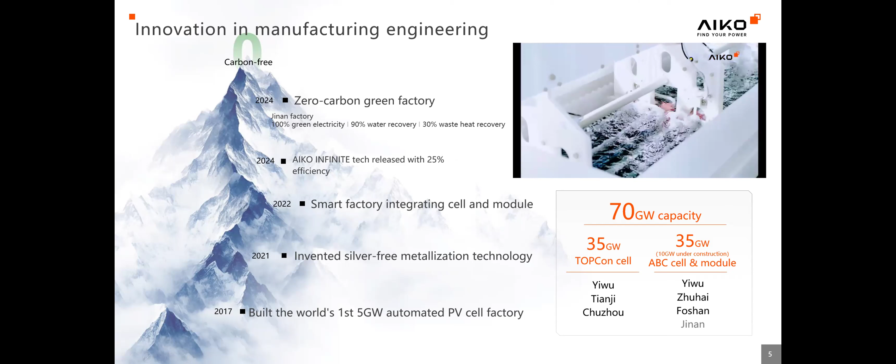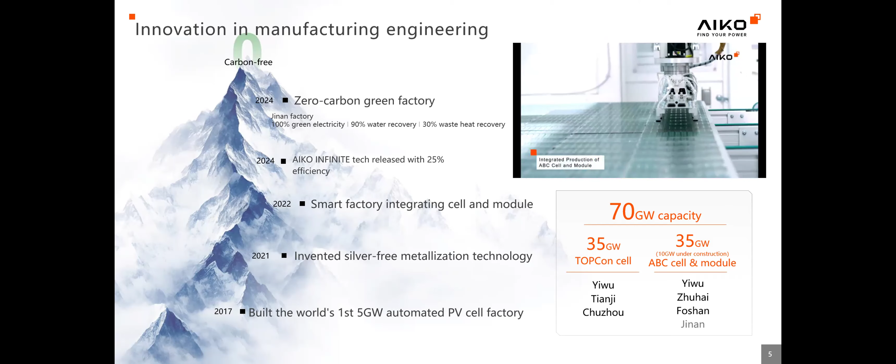This is a video of our production. Yes, as you can see, most things are automatic. For those of you who are familiar with production lines, you can also see what brand of machinery we use, because ABC was quite a new technology. So we had to design quite a lot of those production machines ourselves with the other factories. Yeah, so it is something that is quite innovative to see.

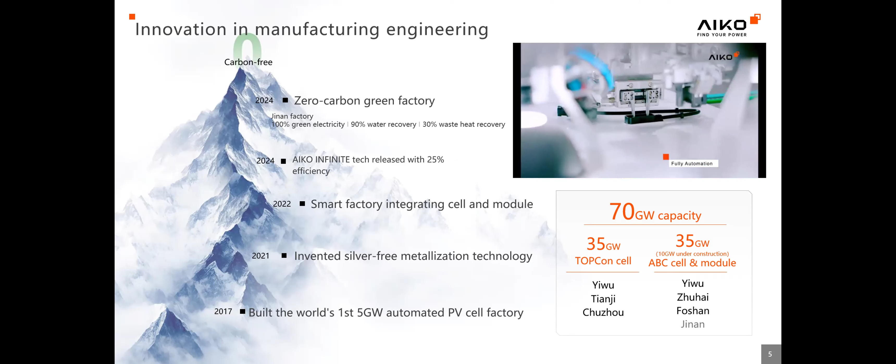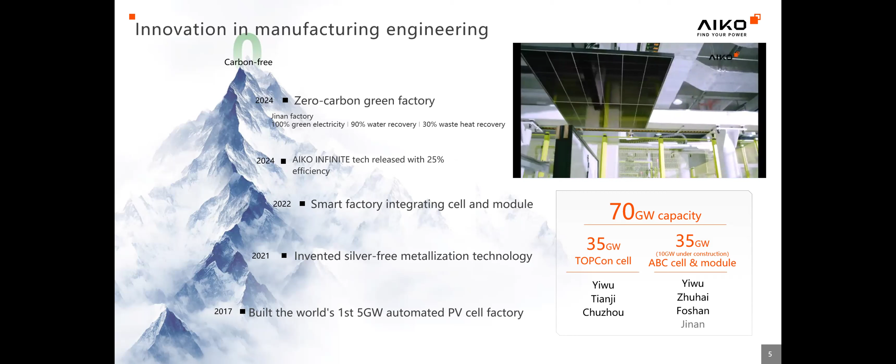I think as you will notice, most of the things are automatic except for the human inspectors, which are needed. And also the installation of the junction box and everything, they are all automatic, even packing as well, which is quite rare. For many manufacturers at this point, when you are installing the junction boxes on the back of the solar modules, it's still manual.

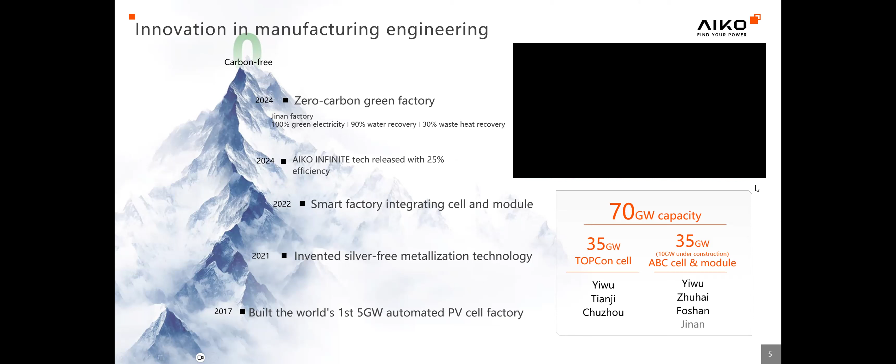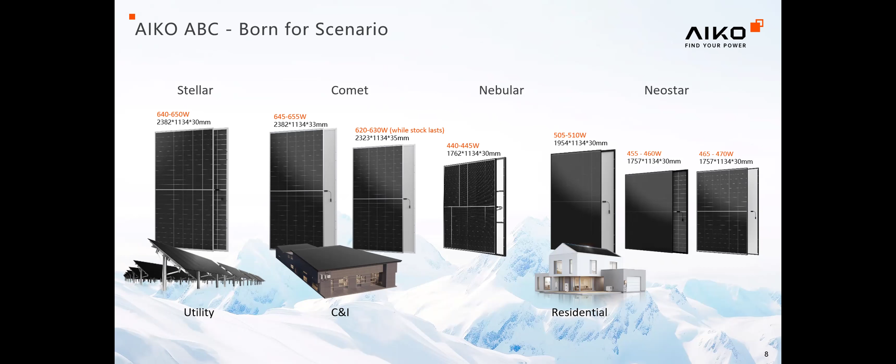So now coming to the product side. This is the full range of products we are providing at the moment. In Sweden, I think most people are more familiar with our 455 full black single glass module. That is the NeoStar, the 54 cell one, 1757 times 1134 times 30 millimeter. The main power class at the moment is 455. We can also produce quite a lot of 460, but this is subject to ordering, as it is very powerful for full black at the same size. There are some new 460s coming up, but the size is like 1800 times 1134, so it is a bigger size in order to reach the 460 watt limit. 460 is what we do provide quite a lot.

With full black we also have the double glass version, which is also mainly 455 as the double glass full black module. And if you don't need full black, we also have the black frame, which will be about 10 watt higher, so the main power class for that would be 465 watt. I think it is used mainly in the other countries in Scandinavia. Going one upwards, we now have a 60 cell, which is 1954 times 1134, for those of you who are not comfortable with large modules but also want a higher output. That module is now 510 watt for full black single glass at the moment. So that is our residential side.

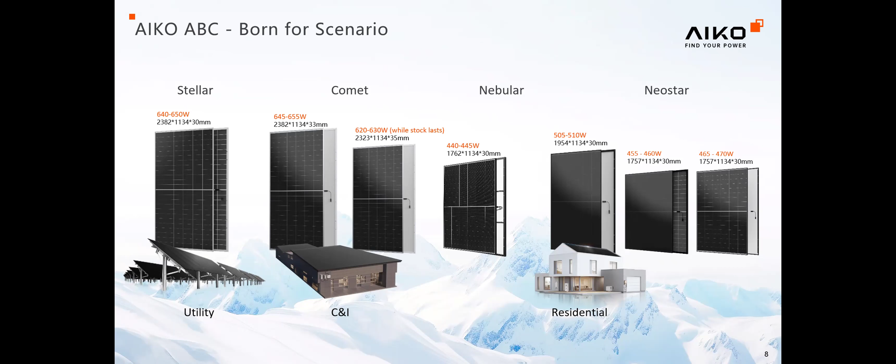Coming to the larger modules, in our warehouse we still have some 2323 times 1134, which is also quite popular, 620 to 630 watt at the moment. We also have the large 2382, going more into the utility and commercial side, at 645 to 655 watt. And then with Stellar, that is the bifacial module with 70% bifaciality rate. Some people may have seen higher bifacial rates in other modules, but with those modules the output you're generally seeing is about 585. If you multiply the bifaciality rate with AIKO's 645 watt main power class, the difference is quite high for each module at the same surface area. Our Stellar bifacial is 645 as the main power class, and it can go to 650 watt as well. And of course, we are expecting even higher wattage next year.

So a few points about the benefits we can provide not only to the installers but also to the end users here. So one thing is that we can provide high power. I think nobody is arguing that. It's 6 to 9% higher output in comparison to the mainstream TOPCon modules. So with more generation, you get your investment back faster. This is something everybody understands. And then with higher power, we're also able to deliver a high return for you.

So what we can do is the partial shade optimization, which is also unique to all the AIKO modules at the moment. I'll explain in more detail because it is a very unique concept. And then we also have a better temperature coefficient: as temperature increases, the solar module performance actually goes down. AIKO has a lower temperature coefficient, so it will be more efficient when there is a high temperature situation. I will explain more in detail.

So firstly, this is the partial shade optimization feature. We are doing an experiment here. This is also something you can do if you have your own AIKO module. You can compare it to any other module in the market; they wouldn't be able to do the same thing. On the left-hand side, the ABC module, we just connected it. It's got an open circuit voltage of 45 volts. In the middle, the water pumps symbolize the power it produces. On the right-hand side, it's other modules, which of course have a lower voltage as they output a bit lower.

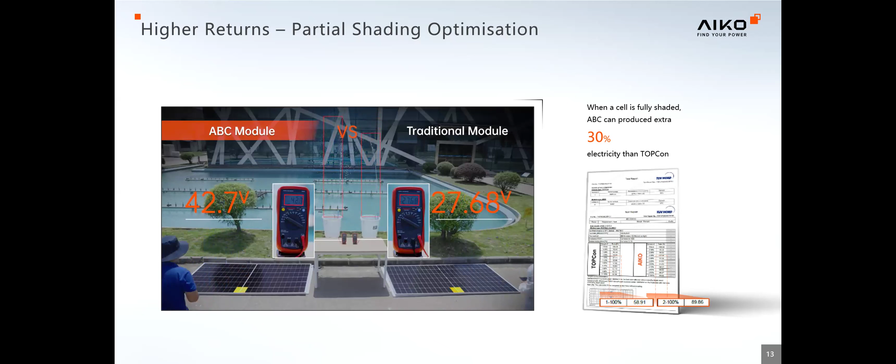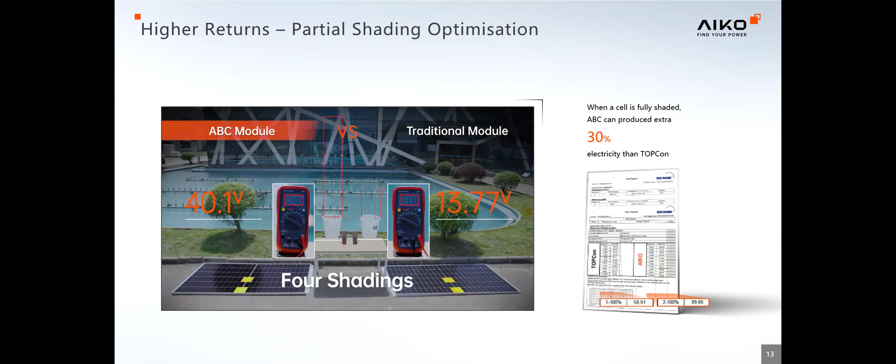Now we've put two shades in the middle, and on the right-hand side it goes from 41 to 27 immediately. That's about 1/3 you have lost. But on the left-hand side, 45 to 42, not so much. Only one out of the 54 cells is affected. And then with 4 shadings, we are staying strongly at 40, and the other module has lost about 2/3, so it's now 13 volts. You can see the water pump has completely stopped for the other module.

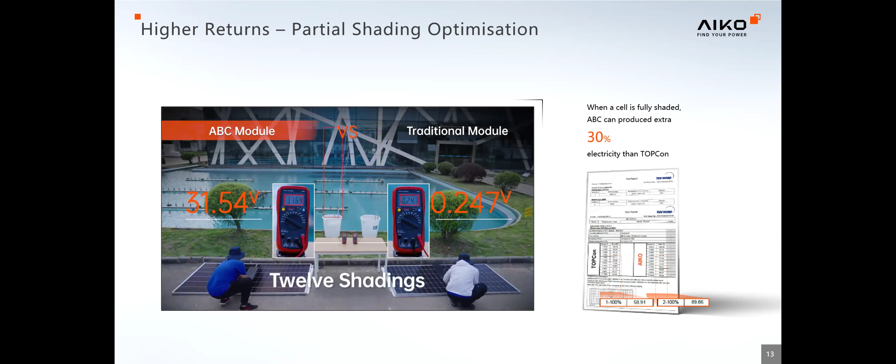With 6 shadings, the AIKO module is still producing strong, but the other module is not producing at the moment. So this is the difference when it comes to shading for our AIKO ABC module and any other module in the market. Even with 12 shadings, which is quite common if you have a cable line or dynamic shading that goes across the board, other modules are usually not producing, and the AIKO module is still producing more than half of the generation. So how do we do it? This is the theory behind it.

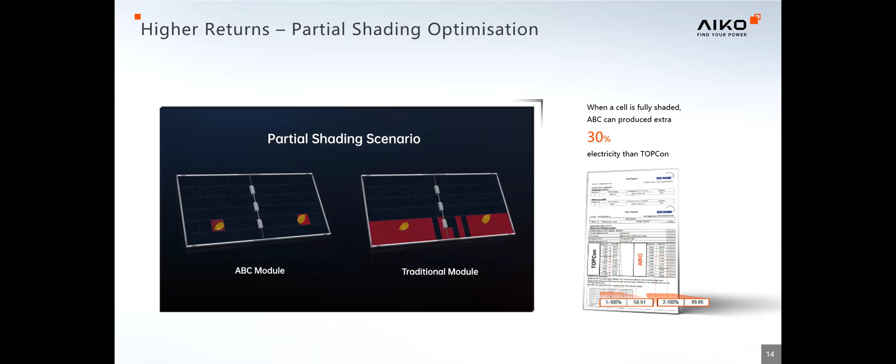So as you can see, there are 3 bypass diodes in the back of the solar modules. This is true for all of them. And once a cell has a shade on it, you can generally see the bypass diodes getting activated, and it has to block off this whole string of the solar cells in order to make sure the other 2 strings of the solar cells within the solar module are able to produce fully.

So this is what they do, and it is a wonderful function, except now with AIKO technology, we are able to let the current bypass the shaded cells. So it doesn't trigger the bypass diodes. So essentially, it's almost like you have a little optimizer behind the solar cells, but it's not. What we have done is a change in the cell structure to allow the current to soft break through between the solar cells.

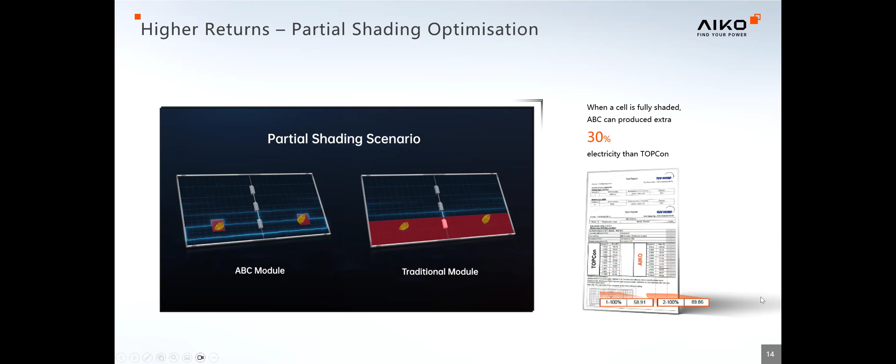So this is something that only AIKO does, and we also have the report from TÜV to certify that when a cell is fully shaded, we can produce an extra 30% electricity in comparison to TOPCon. So we have done some tests on it. This is quite a new concept because with this technology, as an installer or as an end user, if you are after higher generation, usually when you design a project, you would avoid the shaded area completely because it makes no sense.

But with AIKO modules, if there is some production possible from the shade, you would be able to put one over there, and then the AIKO module would actually generate. So for the end customers, apart from the higher efficiency that brings you higher generation, it's another way to boost your generation with limited roof space. And for installers, it is one extra solar module that you'll be installing, which is one way of looking at this feature.

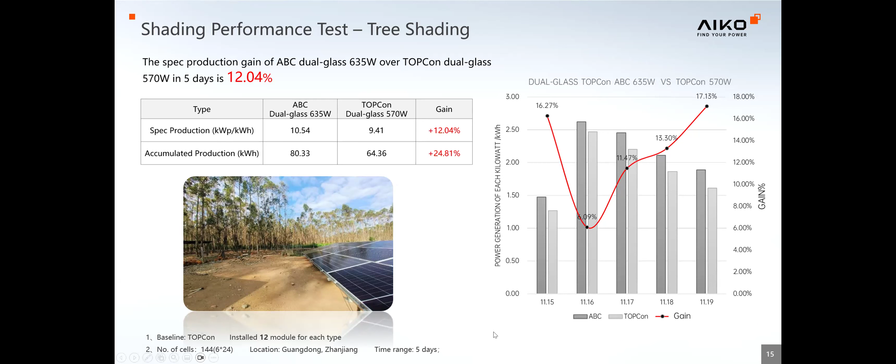So you can see there's more shade benefit on the first day in comparison to the second day, because on the second day, the generation is higher. That means there's less shading. So you can see it is actually because of the shade difference. So under the tree shade situation, it is around 12%.

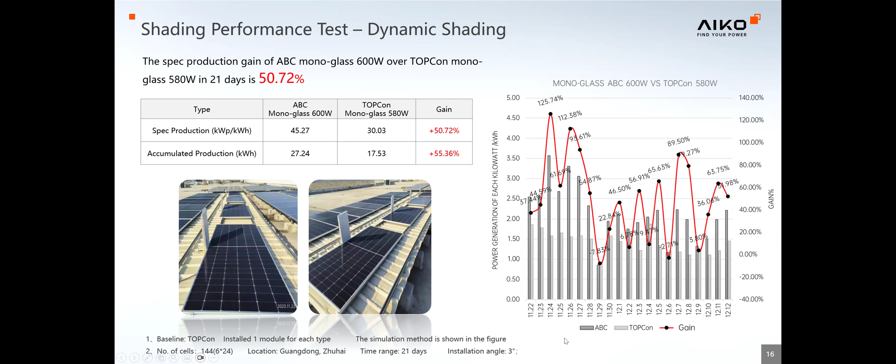And then we have also done it for dynamic shading. So this is like if you have a chimney on your roof, or some complicated structure on your rooftop, and then you can see this is about a 50% difference that we can gain. This is the highest scenario that we see.

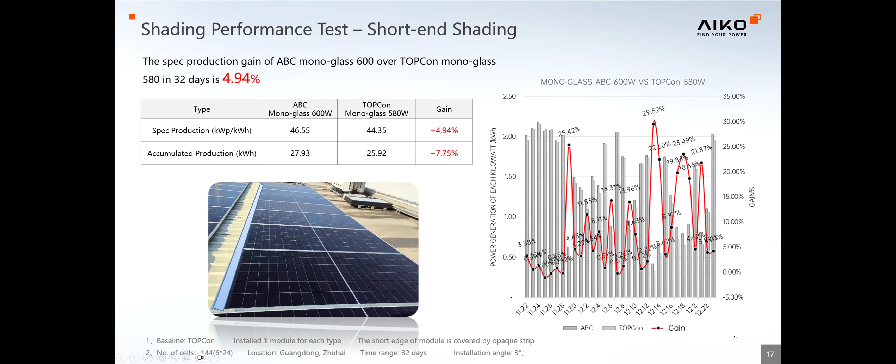And then with the short end shading, you've probably installed your solar modules in portrait, and then there's maybe some dust collecting at the bottom, or maybe in Sweden, some snow deposit at the bottom line after a heavy snow. So you can see around 5%, because in this scenario, the shade is quite limited because it's just one row. Actually, if it covers more, there will be more shading gain. But even with one row, there is already a 5% difference when you have the AIKO partial shade optimization benefit. So this is with our shade optimization.

And then with the better temperature coefficient, AIKO is 0.26%, and the best in the market at the moment, TOPCon, is 0.29%. 0.29 was the 100, the full mark back then, when the CEA or PV Maxing, I think, experiment body tested all of the solar modules in the market; they gave 100 to 0.29% for TOPCon. But then AIKO came, and we got a grade of 107, because it is better than what they set the 100 point at. They were surprised. And this year, when they redo the test, AIKO 0.26 will be the full mark point.

So when we talk about temperature coefficient, people think, oh, my country is quite cold. It's not high temperature, so it doesn't really affect me. Actually, you need to think about the temperature. It's not the temperature you feel; when the solar modules are in operation, they will have a higher temperature compared to the room temperature that you're feeling. So it does actually give you an advantage.

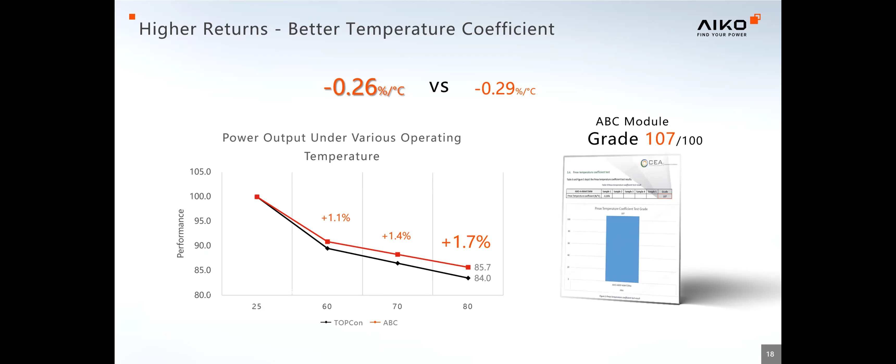So you can see here it's about 1% during cold temperature, and then if it goes higher, like these days in the summer, it may go to about 2% difference. So this is also something that the AIKO module can provide to you.

Also coming to the lower degradation, there are about 3 technologies at the moment in the market. With our ABC technology, we are able to reach 88.9% after 30 years. The mid one would be HJT, which some solar module manufacturers use, that is heterojunction, and they reach 88.1%.

That's already a 0.7% difference. And then with TOPCon, there's even further distance. It's more than 1% difference for the degradation at 30 years, and also at 25 years it's already 1% between the ABC technology and TOPCon technology.

We have considered other technologies before we decided that we will be doing the back contact technology. One main point is because of the degradation. As everybody knows, for solar systems now everybody is considering 30 year performance time, so we would like a product that will be actually generating as much as we can for the 30-year product lifetime.

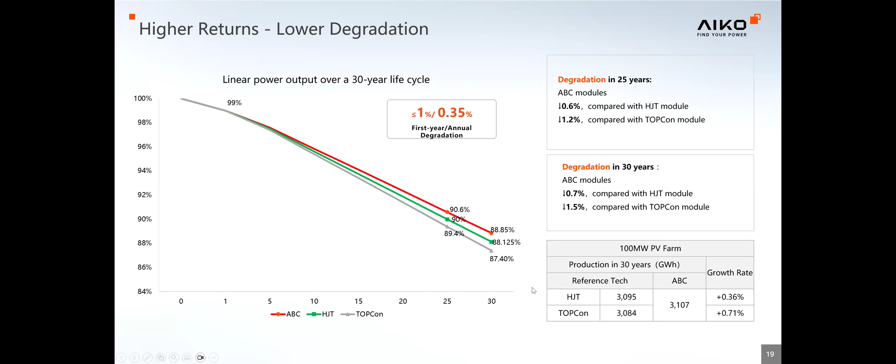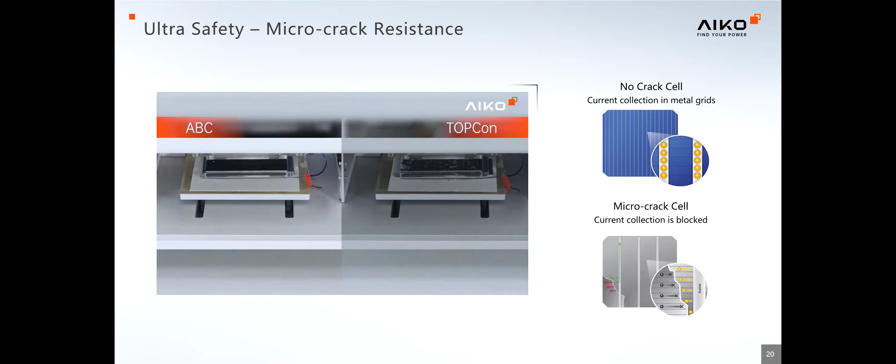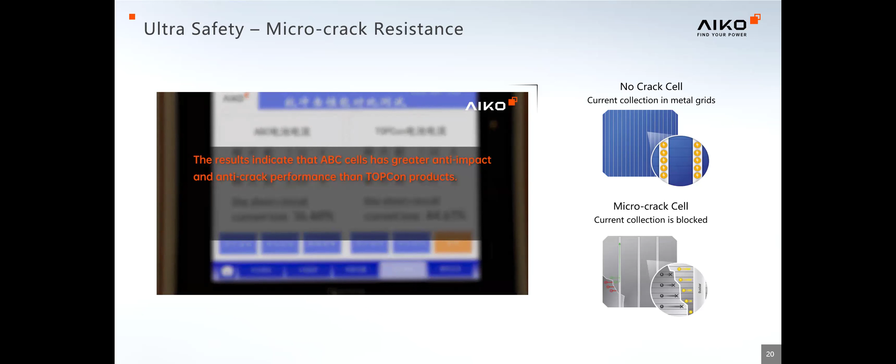But you can see with ABC modules, we remain quite intact, and we only lost about 16% of our production. With TOPCon, it lost about 44% of their production. I think the comparison in the pictures is quite clear.

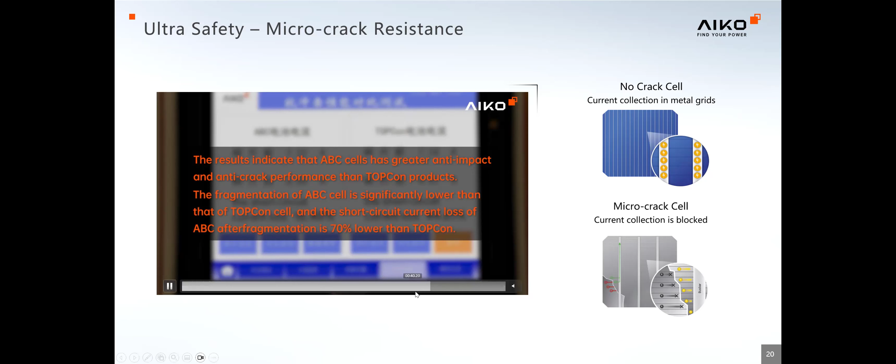You can see here with both solar modules, the AIKO module still doesn't really suffer much damage. I'm sure there are micro cracks, but I think for the TOPCon modules it's mainly macro cracks, as we can see here. So this is the difference in sturdiness between our cells.

This also relates to Scandinavian countries, or the northern part of the hemisphere, for those of you with heavy snow situations. I know that on the data sheet we all have certificates saying that our modules can withstand a certain Pascal snow load. But you need to understand that even though the modules are structurally sound enough to hold themselves together at that heavy snow load, after the snow load, what you don't see is what happens within the cells.

You get loads of micro cracks inside your solar modules, and it greatly reduces the performance. What you can see here with AIKO is that the microcracks created wouldn't affect our modules as much as other modules in the industry. So even at the same snow load afterwards, even though two modules both survived that snow load, the AIKO module will be able to still keep the performance higher in comparison to other modules.

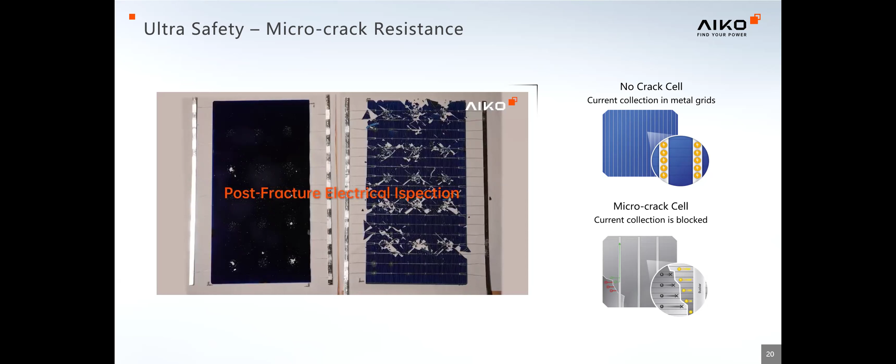We are looking to do more tests on that, but at the moment this is what we can very easily show you on the cell level, because of the cell structure difference. And then we also have our safety features.

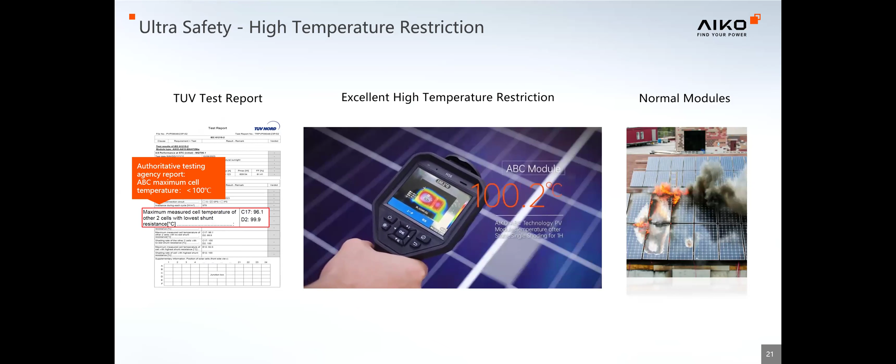This is our high temperature restriction comparison. Same test we've done with other modules - these two modules have been shaded for 1 hour, and we're testing temperature. The other module is around 150 degrees, while our ABC modules are at 100 degrees. That's about 50 degrees Celsius difference between the two modules.

With that, it comes with a lower fire risk, which is why our modules are actually quite popular and accepted by some public buildings, for example schools, government, or hospital projects. We've been winning those tenders, and one of the main reasons is the temperature restriction.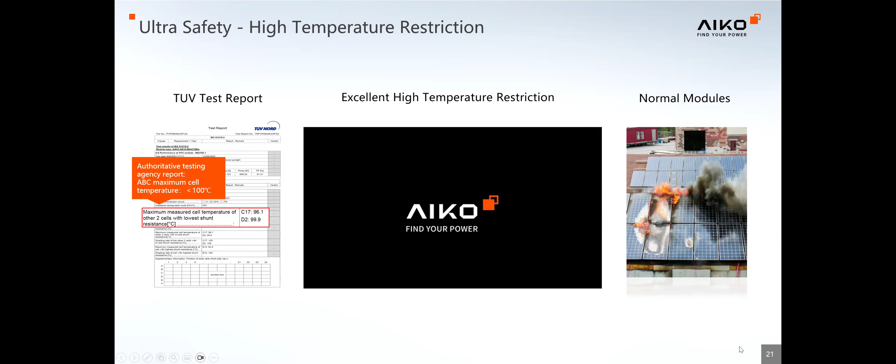We also have here on the left-hand side two test reports showing that our module generally, when shaded, reaches around 100 degrees. Yep, so these are all the features that we have.

We've only been in the industry since I joined last March, so that's when we started actually developing into Northern Europe. For the Sweden market, it's around September that we started entering.

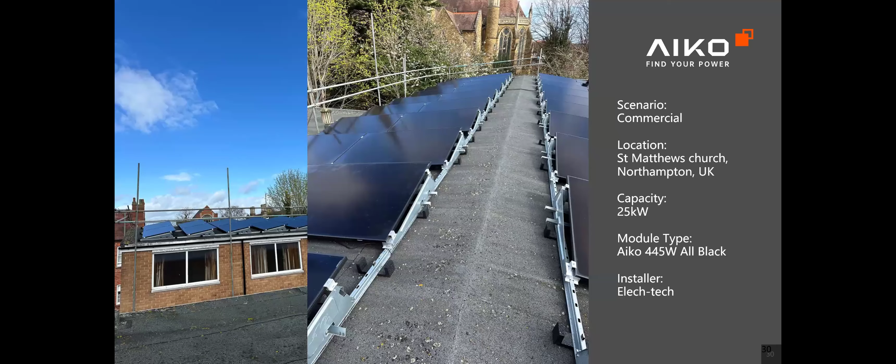We have also done quite a lot of residential case references - we only pick the ones that look good here - plus some smaller commercial projects we've done, just to show you guys.

This is actually a church roof, a quite old church. They were concerned with structural maintenance and also with the space they have. But hey, churches still want to be green, so what they did was use our AIKO modules.

You can see here all the modules are installed quite closely with each other, but they're not too afraid of the shading effect because AIKO modules are able to have partial shade optimization - all the modules would still be producing even if there's a little bit of shading at the bottom.

Also they are using us because we are the most efficient module in the market. This is how much space they have on their roof, and that's why they're using AIKO modules. I think this is very similar to what other people are using us for in those situations.

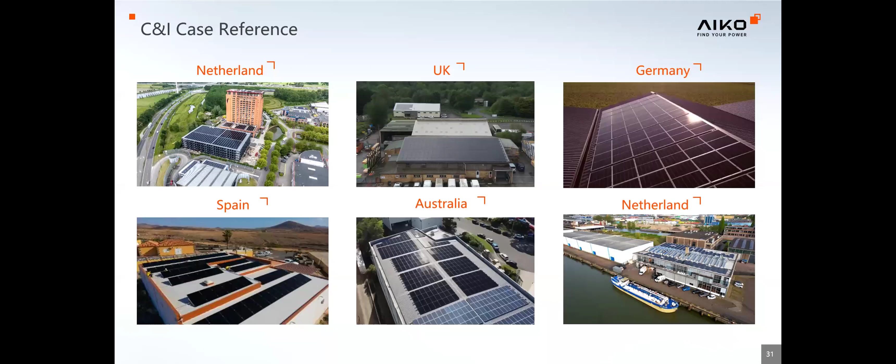And of course, the aesthetic, the blackness of our module, is another thing that the end customers like about us. Here is another example of partial shade optimization being used.

As you can see, this is quite a complicated roof - there's even a little pole between the two solar module rows. This is one of the reasons why they are using AIKO modules, for our partial shade optimization. And also, as you can see, this is grass here.

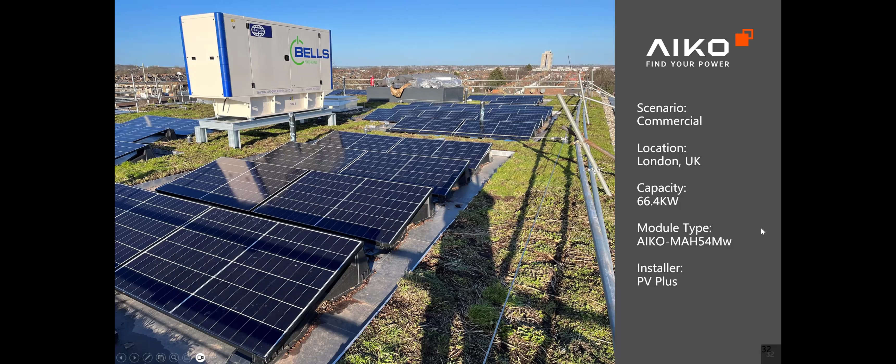This is actually a green roof, so there's also a consideration for the temperature restriction here. Yeah, so this is why they are using us.